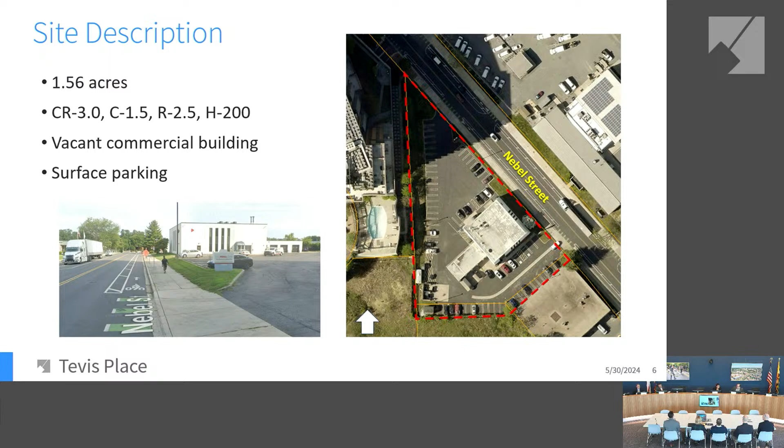Can I ask a quick question? Sure. I don't remember from reading—is WMATA holding onto that property for any particular reason? I assume it's for construction purposes, but— There's a lot of vacant parcel there. I happen to know the place fairly well. Actually, good question, because something I forgot to mention is that WMATA is partnering with the county, state, and federal governments to try to attract a life science user, a large life science development with over 2 million square feet on this part of the property. Okay, thank you for the question.

Is the Aurora building all occupied? Yes, I think these are all occupied. This is the newest building that's already constructed here, and this one is currently under construction. It's not shown—this aerial image was taken before construction started on this fourth building. And what are those other buildings, the one you said just constructed—is that residential also? Yes, this one is residential, all four of these are residential. This building, I believe, has the Harris Teeter grocery store in it. Okay, wonderful, thank you.

The property subject of these applications is just over 1.5 acres in the CR zone. It's developed with a commercial building surrounded on 3 sides with surface parking. There are currently 2 driveways from Nebel Street that provide vehicular access, one here and one here. There's a bike lane along the property frontage, separated from vehicle traffic just by pavement markings, and adjacent to the sidewalk. The property doesn't have any significant environmental features currently.

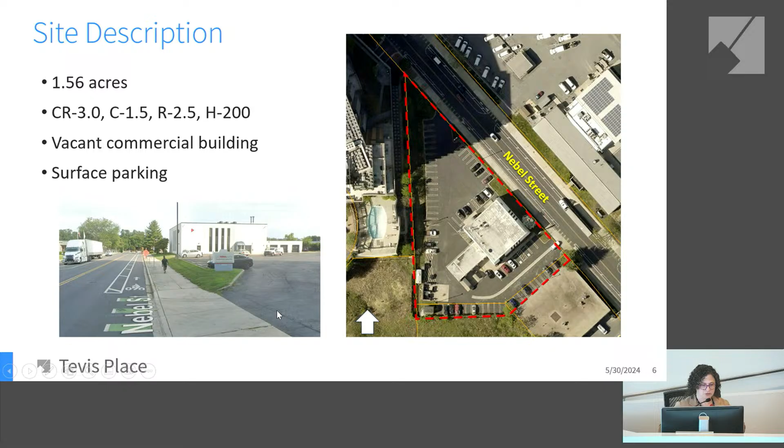The proposed building is 154 units, all of which the applicant plans to provide as MPDUs, affordable to households earning between 30% and 70% area median income. The applicant plans to apply for low-income housing tax credits and is working to identify other types of financing for the project. The building will have a variety of unit sizes ranging from 1 to 4 bedrooms to suit lots of different lifestyles.

Vehicle access is consolidated to one driveway on the northern part of the property, which leads to a below-grade parking garage and a loading space behind the parking garage.

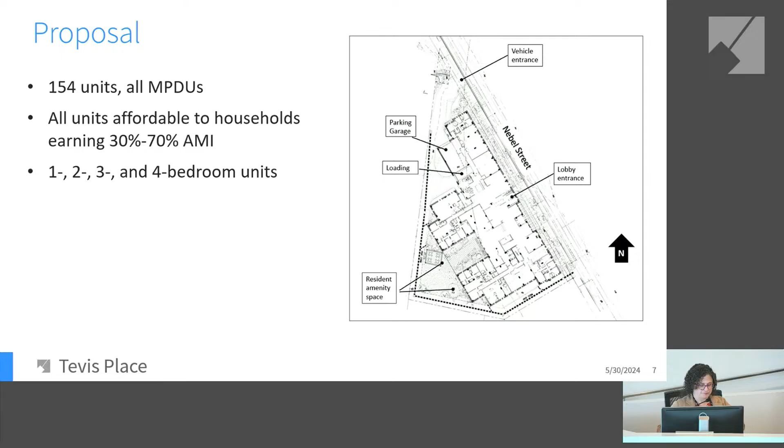Including bonus density for exceeding the MPDU requirement, the project density will be 2.8 FAR, or floor area ratio. The building will be 5 stories of wood framing over a concrete podium, for a total of 80 feet in height, or 7 stories. The architecture responds to the triangular shape of the property by framing Nebel Street with the primary building facade, with 2 smaller wings flanking a courtyard in the rear. The uses facing Nebel Street on the first floor, including a lobby and ground floor units, are designed to help activate the public realm and enhance pedestrian safety. Many of the upper floors facing Nebel Street will have balconies, and the streetscape will be enhanced with street trees and landscaping along the base of the building.

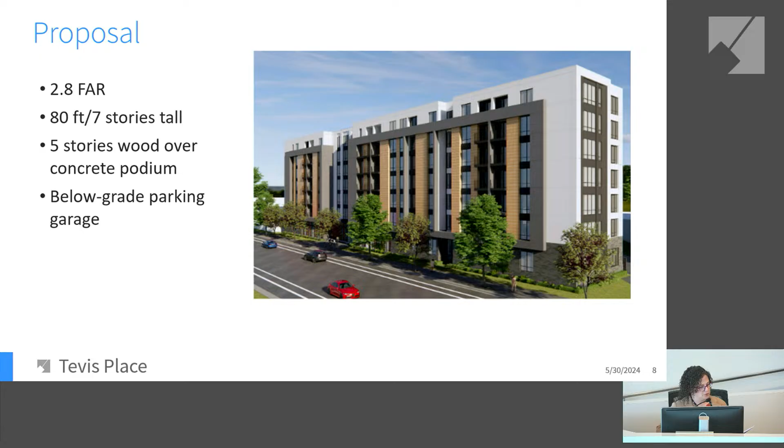Fortunately, this property doesn't have any overhead utility wires, so large street trees can be planted along the property frontage. Vehicle access has been consolidated into a single driveway on the north side of the property, leading to the parking garage and the loading dock.

And the streetscape, as I mentioned, will be improved with a street buffer planted with trees between the sidewalk and the bicycle lane. So the zoning code does not require projects on properties less than 3 acres in size with only one frontage to provide any public open space.

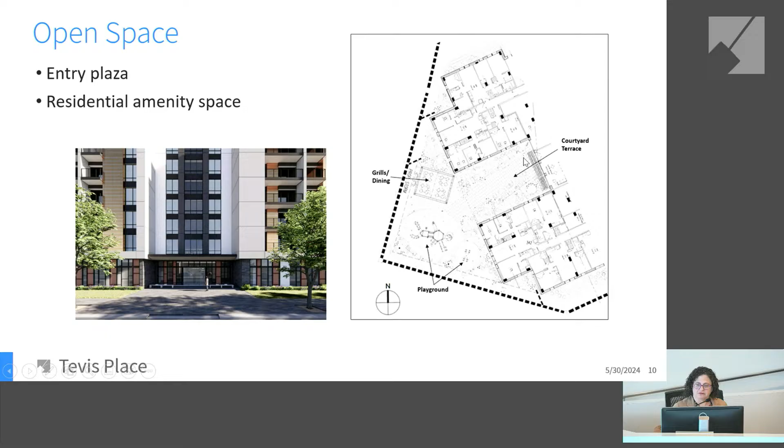However, the project is providing some public open space along Nebel Street adjacent to the recessed lobby, which you can see here in this image, and this area will include seating and landscaping. The project also provides outdoor amenity space for residents to the rear of the proposed building, and this area will include playgrounds, grilling space, dining space, landscaping and seating areas.

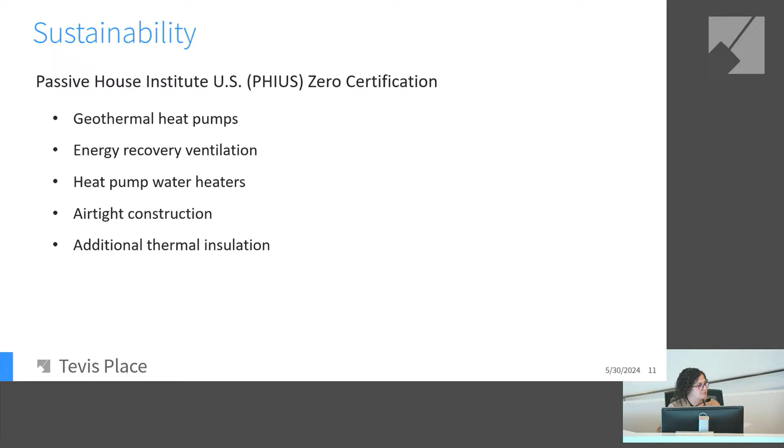So another fantastic feature of this project is the sustainability elements that are proposed. As I mentioned, the applicant is seeking Passive House Institute US, or PHIUS Zero, certification. These are just some of the elements listed on the slide that are over and above code requirements that will contribute to the PHIUS certification. The goal with PHIUS Zero is to net out the energy use on an annual basis with renewable energy. I don't want to steal the applicant's thunder here because I think they're going to describe this in a little more detail to you.

Regarding forest conservation, the 2/10 acre requirement for afforestation will be met off-site through a forest bank if available. If a forest bank is not available, the applicant will pay a fee in lieu.

This project earns what I think is a record number of public benefit points for the MPDUs, mostly because of the MPDUs that are provided above the code requirement. They're earning 450 points for the MPDUs, and points for proximity to the North Bethesda Transit Station and for providing the majority of parking in a below-grade structured garage.

Can I just ask a question? The transit proximity — they're just half a mile. What does it take to get 50 points? I think it's if you're adjacent or on top of the metro station, then you get 50. Oh, really? Is it an easy walking path, or do they have to walk around Nebel Street? I don't know if it's through the metro property — they have paths for people to walk to the metro. Because of the configuration of the adjacent buildings, you would walk on Nebel Street and then along Marinelli Road. So it's an easy walk on existing sidewalks. Thank you.

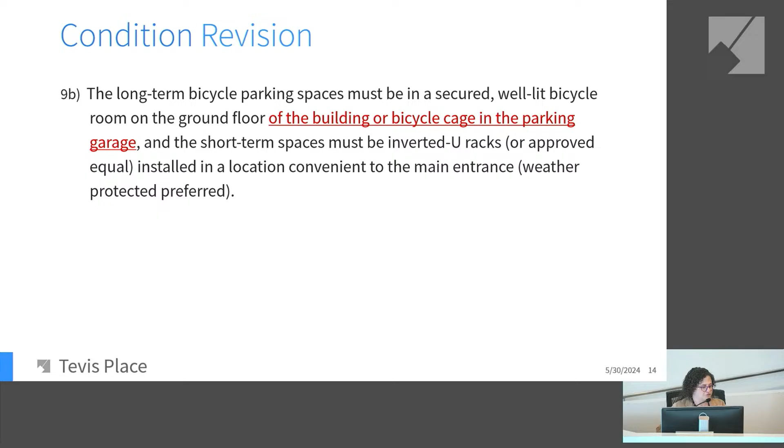And then in terms of the analysis and findings, the administrative subdivision plan satisfies all the requirements of Chapter 50. The site plan meets the requirements of Chapter 59, the zoning code, and the forest conservation plan meets the requirements of Chapter 22A, and it conforms to the environmental guidelines. And that concludes my presentation. Happy to answer any questions you have.

Since we have time today, can you show us the slide about affordability? Sure, I think that would be very nice to see. Thank you.

Do we know if, maybe I should ask you, if they're for rent or for sale units? Just curious, not that it matters. Sure. Good morning, Heather Dlhopolsky, Land Use and Zoning Attorney for the applicant with Wire Gill. They are for rent, but I will turn to Don Nuzio with the applicant, TM Associates, to give any more detail you may want on that. Okay, thank you.

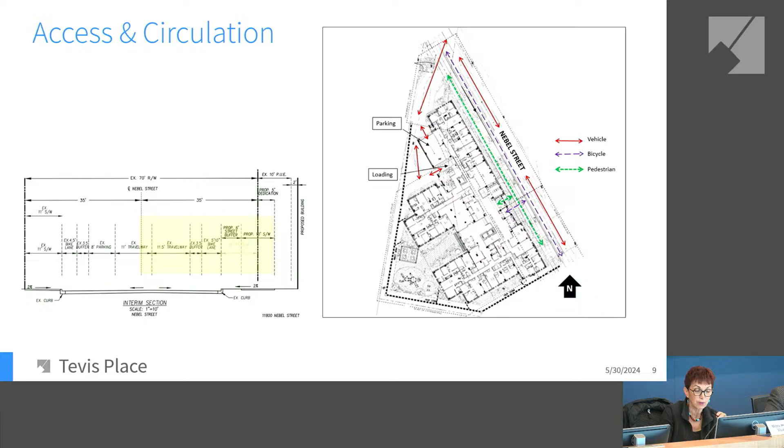Before I let you go, I think it would be good, because we have all of these residentials in the metro area in that block — do we know that within the last 5 years, how many units we have added and what percentage of those units are MPDU? With the ones that we have and the ones that may come, just in that block. It would be good information to know in that area. You don't have to answer it now, you could tell us later — in the area that you have it yellowed. Oh, okay, yeah, we can follow up with that. Yeah, thank you.

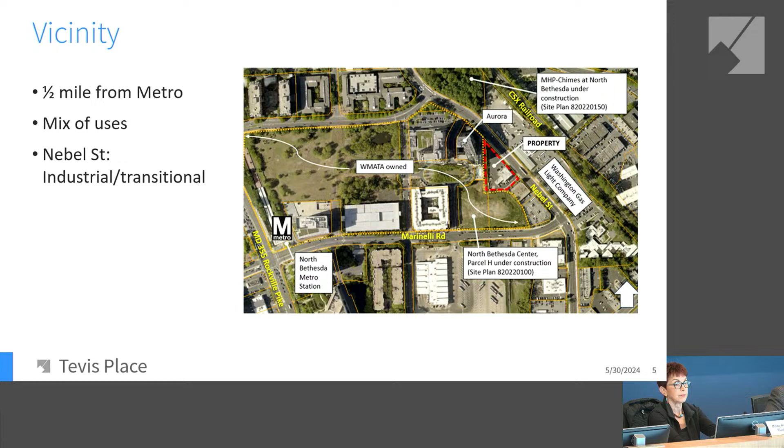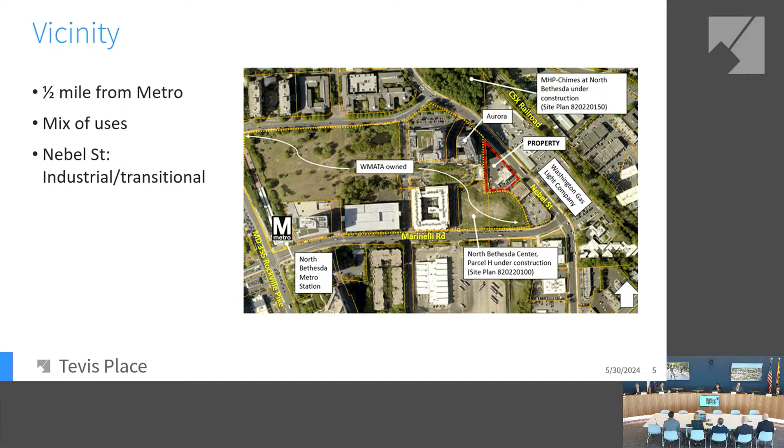Okay, so is there any questions? Josh? I have one question building off Commissioner Pedoeem's question earlier about the path that folks would take to get to Metro.

Looking at this image, there's a shared open space in the center of what's eventually going to be several buildings. Will this property have access to that space through the backside of the property? In other words, will people be able to access that without having to exit on Nebel Street first and then walk around?

So that is something that we explored here, but there is a big grade issue. There's a big wall here, and then this is a pool, I believe, on top of a parking garage. We did explore if there was some way to get through the parking garage to this green, but unfortunately that didn't work out with the grade and some of the other issues with this site.

Oh, okay, gotcha. I suppose, given that the property to the south is currently under construction, and I'm not familiar with how that site plan is arranged, I assume it was probably too complicated to figure out some sort of access point through that property, or maybe even some sort of easement. But it would be nice if there was a way to chop down the walking distance a little bit for folks instead of having to curl around on Nebel Street to Marinelli.

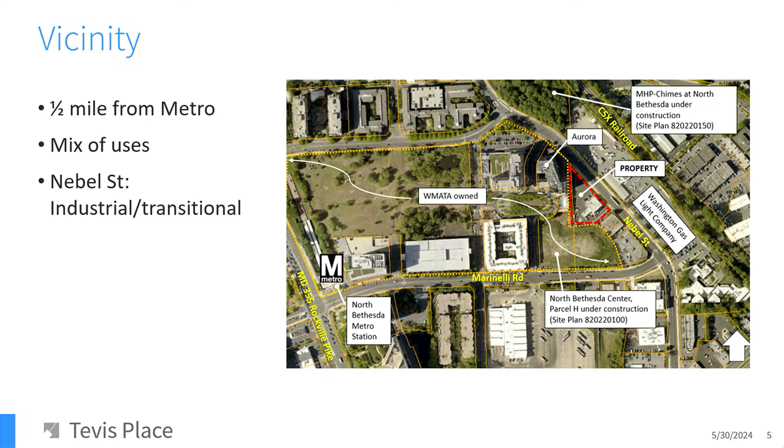For the record, Jason Sartori, Planning Director. I'm going to take the screen for a second and show you a street view from the actual site, the Tevis site. If we turn this, you can see the existing building on the site, and this is Nebel back over here.

You can see the parking garage that Ms. Tettelbaum has been talking about, with the pool up here, and this is the building under construction that comes right up to that parking garage. So you can see from the site, this is where you're asking if there could be access through here, which clearly would be difficult.

Okay. Okay, thank you. Any other questions?

One other general question. Can you remind us what the relevant master plan is that covers this area? Sure, thanks. It's the 2010 White Flint Sector Plan. 2010 White Flint, okay, thank you.

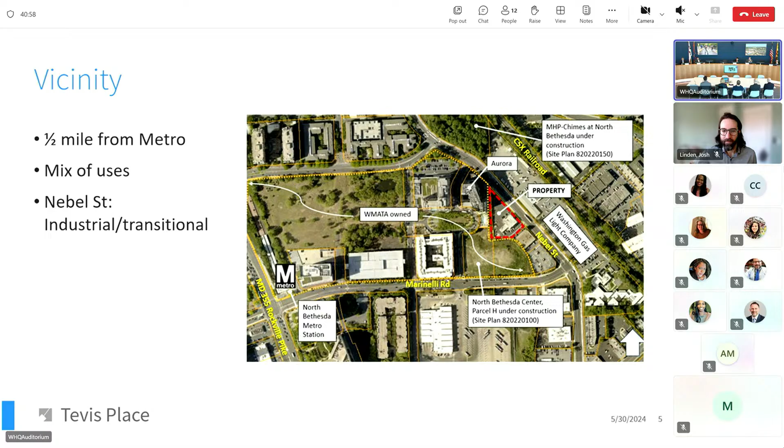Okay, so we have the applicant here, please take the lead. Good morning, Madam Vice Chair and members of the board. For the record, Heather Delapolsky, Land Use and Zoning Attorney for the applicant. I have three folks with me on behalf of the applicant, TM Associates: Don Nuzio, Adam Stockmaster, and Zebulon Culver. We also have Kevin Johnson with Johnson Burnett and Associates, our civil engineer, Rob McLennan with McLennan Architects, our architect, and online is Nancy Randall with Wells and Associates, our traffic engineer.

Just a quick comment regarding the access question: we definitely agree that having access from the west part of the property over to Metro would be great. It looks good on a 2D plan view, but there are a lot of grade issues here. We did meet with Elcor, the owner of Aurora, who is also doing other development in the area, and while we had discussions, we all agreed that given the physical constraints, it just isn't going to work at this time. But we do agree it would be a nice idea.

We're always excited to get to planning board, but even more so here, as we are the first MIC plan. We're very honored and excited to use that process. As Matt said, we completely concur it definitely required a lot of work and quality submissions on our part, but we hope and think we held up our end of the deal to get this project to planning board hearing and construction pretty quickly. Don Nuzio will speak in a moment about our experience more specifically.

We are in full agreement with staff's report and presentation, as well as all the proposed conditions of approval, including the revised one Emily mentioned in her presentation. We don't have a formal presentation today, but Don will speak a bit more about our experience with the MIC process and the sustainability aspects, which are very unique here, especially for a project that is fully affordable. If you have any other questions, our full team is here and happy to answer.

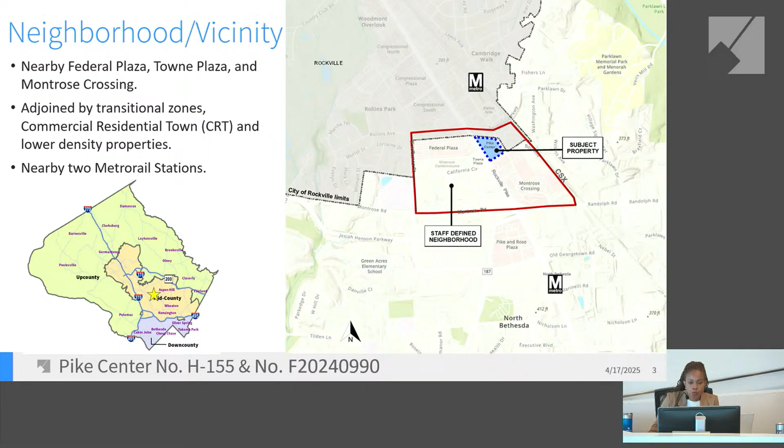Moving from process to the site, Pike Center is surrounded by a number of large shopping centers along Rockville Pike. It's surrounded by Montrose Crossing to the south, Towne Plaza, and Federal Plazas to the west. The staff-defined area outlined in red identifies the properties that contribute to the community character that may experience the most direct impacts of the proposed rezoning. The surrounding neighborhood is generally bounded by the CSX rail tracks to the east, Montrose Road to the south, East Jefferson to the west, and Rollins Avenue, Twinbrook Parkway to the north. The staff-defined area primarily includes commercial properties that abut the subject property, but it also includes some medium-density residential uses, some further west that stretch towards East Jefferson Street.

Bringing you more closely to the site, Pike Center Shopping Center is located at 12101 Rockville Pike, within our 2018 White Flint 2 sector plan. The tract area contains 8.24 acres of land. The property is zoned commercial residential with buildings permitted up to 200 feet. It's currently developed with approximately 80,000 square feet spread across 3 commercial buildings: an L-shaped retail strip pushed further away from the corridor, and 2 standalone retail pad sites closer to Rockville Pike. We have 2 sides of the property that abut the city of Rockville. I'll note there are no sensitive environmental resources on the property.

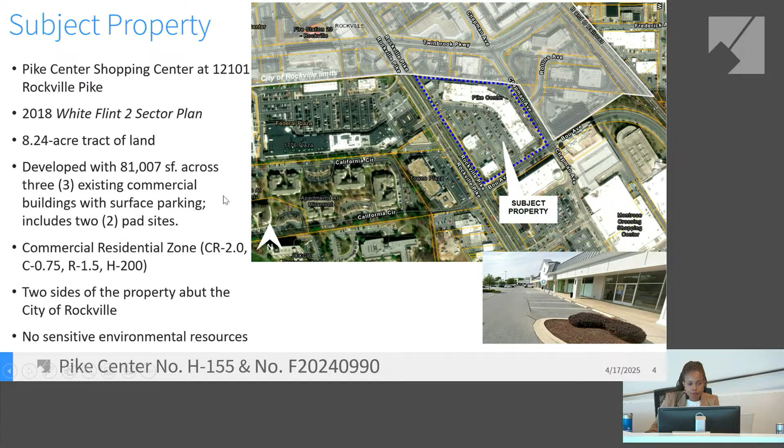Bringing you up to speed with prior approvals on the site: it was platted in the early 60s, but looking through the site plan history, there have been several applications for this property. In 2009, the site was approved for the addition of the 2 pad sites that currently exist. In 2010, there was an administrative approval for minor site plan modifications including parking shifting, lighting, and extending the canalization island. More recently in 2023, there was another amendment approved administratively regarding the applicant wanting to utilize the parking requirements of the zoning ordinance that went into effect in 2014. This allows the applicant greater flexibility with the tenant mix at the property, and there were no physical changes as part of this amendment.

Getting into the proposal, the floating zone plan proposes a rezoning of this property, which is currently commercial residential with 2.0 FAR, up to 0.75 for commercial, 1.5 FAR for residential, and up to 200 feet in height of development. They're requesting to go to commercial residential floating, which would have a max of 2.5 FAR, up to 0.75 commercial, up to 2.25 residential, and the height would remain the same.

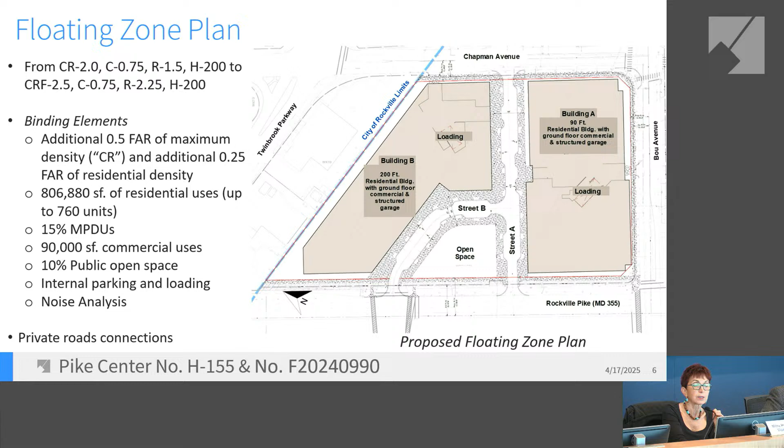Yeah, I understand that. My question was, could we just change the zoning to what they're asking rather than making it floating, or are we required to have it floating?

It's required. Robert Kronenberg, for the record: the county council, acting as the district council, is the only entity that can change a zone, and this is the way to do it. Usually for floating zones we see an R60, R90, or another lower-intensity zone changing to a CR type of zoning allotment. This one already had a CR zone, and the only way to increase the densities on it would be through a floating zone.

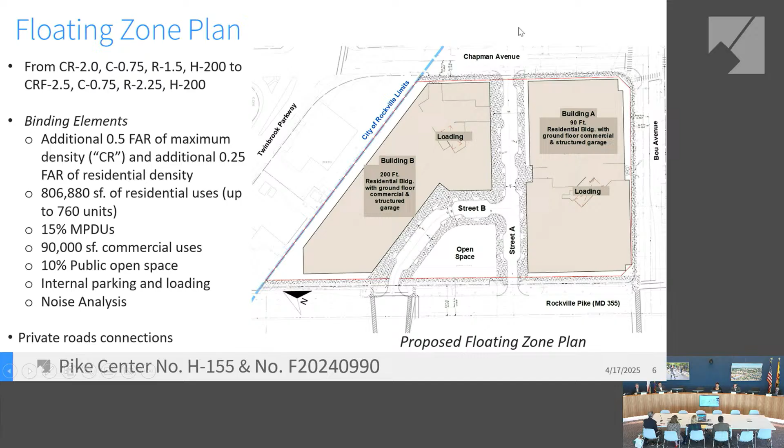The application will also provide 10% open space as well as 15% moderately priced dwelling units.

In terms of phasing, the application proposes 2 phases. The first phase consists of demolishing part of the existing strip mall, primarily on the east side, along with the 2 smaller freestanding pad sites. Building A, with commercial and residential, would be the first phase, and Building B would come in the second phase, during which the remainder of the building and the surface parking would be demolished.

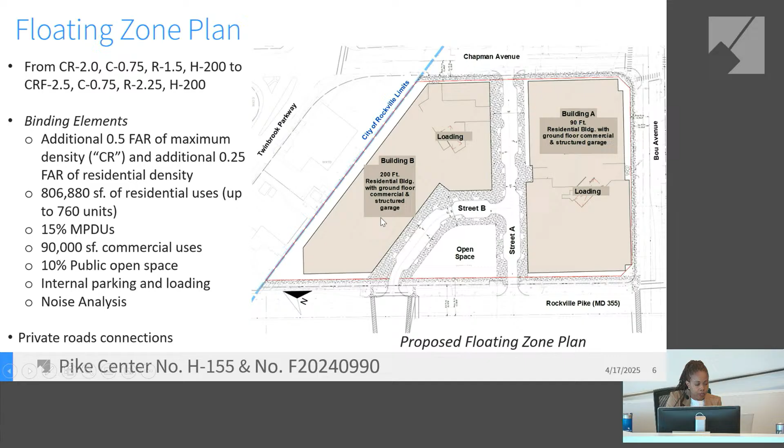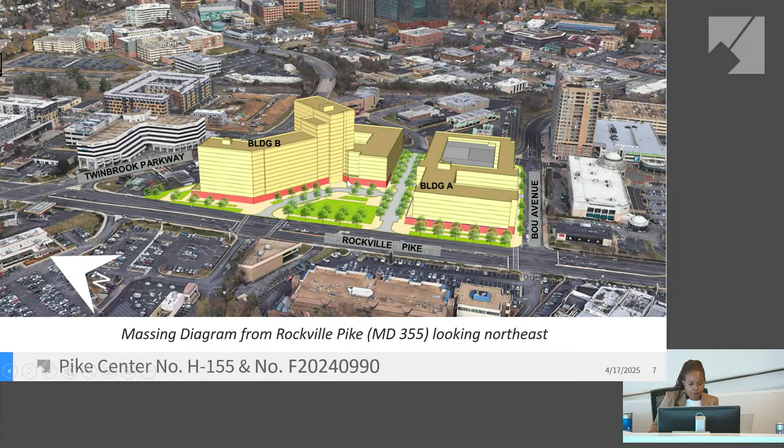The maximum height is 200 feet, so 90 feet is proposed for Building A, which you can see relative to the surrounding buildings. Building B is proposed up to the maximum of 200 feet. They're pulled forward to hug the open space and frame the central open space.

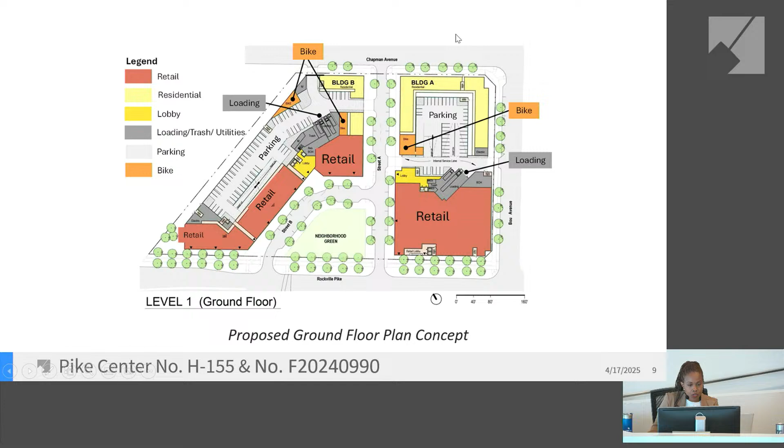As part of the improvements, the application will provide a number of right-of-way dedications, and this allows them to meet all of our requirements of our Complete Streets Design Guide, and also addresses our bicycle and pedestrian plans.

On Chapman Avenue, 5 feet of right-of-way will be provided, yielding a 10-foot wide side path. Along Bou Avenue, an additional 6 feet of dedication will be provided, yielding a 10-foot wide side path. Along Rockville Pike, the application will provide 15 feet of additional right-of-way, yielding an 8-foot wide bike path and an 8-foot wide sidewalk with a buffer.

I also want to point out that this segment is also identified as a future bus rapid transit corridor. There are prior studies that were done that settled on an exclusive center running transit lane for the buses. So that has been a part of this conversation.

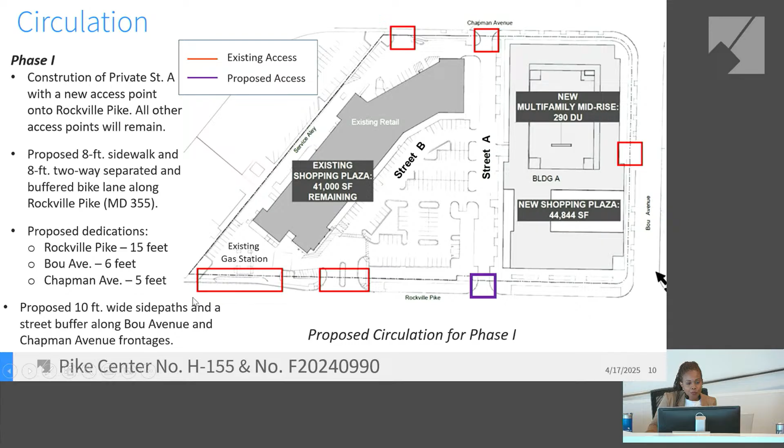The improvements along this frontage will be designed with an interim condition until the State Highway Administration builds the ultimate design. But this improvement will continue to be discussed when the applicant comes in during their preliminary plan.

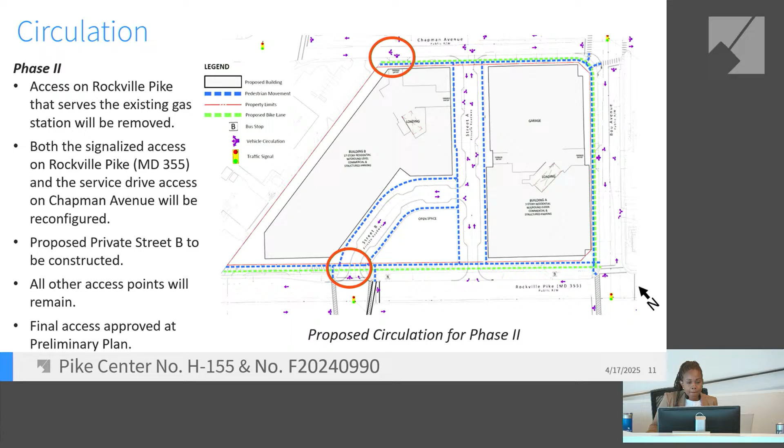Can I ask a question on that? I think you actually just answered part of it. I was going to ask that specific thing about how these bike ped improvements would eventually tie into the future BRT design. And it sounds like we're seeing it as an interim condition, which I think is totally fine.

But I wonder if, as more of these potentially come up along stretches of Rockville Pike, we urge applicants to consider or build out what will be a pretty high quality facility for bike ped. I don't know exactly how to tie them together so they don't have to be rebuilt in the future or redesigned. Because eventually this could also be a way to reduce the overall cost of the future BRT, which I think will include versions of bike ped infrastructure as well, potentially.

This could be seen as maybe a little bit of a marginal cost of the overall BRT project, but I'd hate to see many instances of having to tear up work that was done previously. I'm not sure what, if any, conversations can happen with SHA or MCDOT over the next few years about informing them of where these bike ped facilities are going, and seeing how we can fit them into a future design for BRT if feasible, so things don't have to be redone in the future.

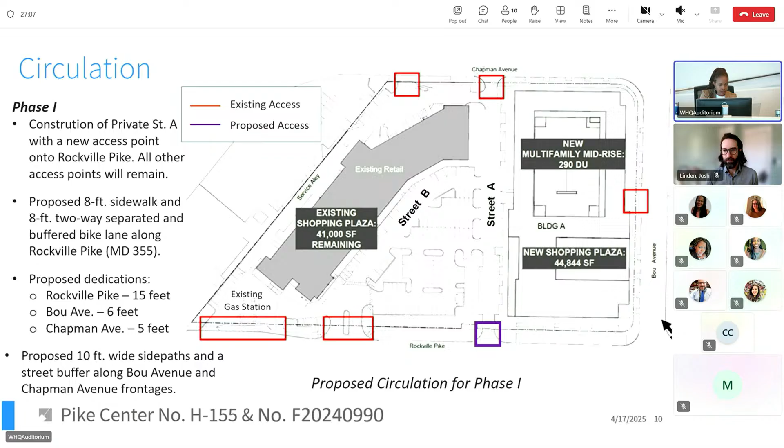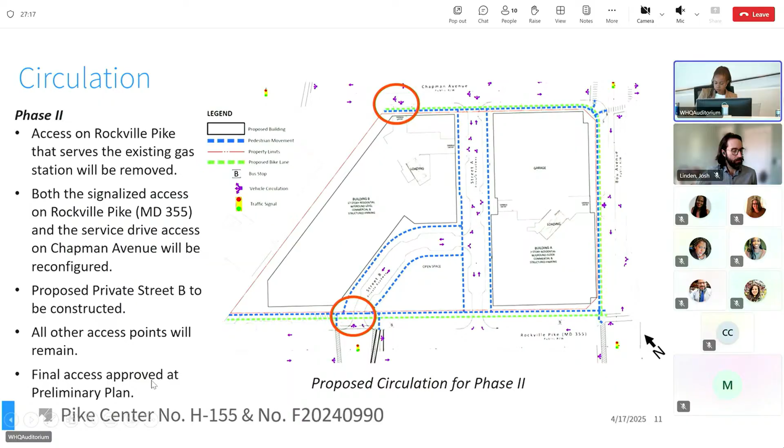Moving into phase two, there's an existing gas station here that has 2 curb cuts. In phase two, these curb cuts will be removed. That currently serves the gas station. You can see where the 2 red circles are. Both the signalized access for Rockville Pike and the service drive on Chapman Avenue will be reconfigured.

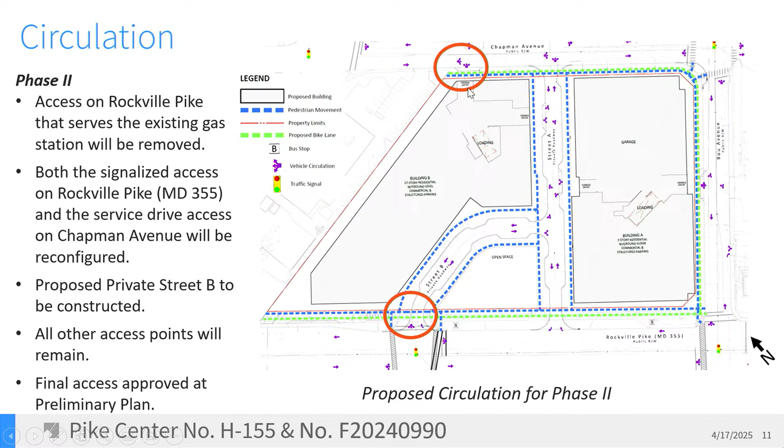And then proposed Street B will come online. This connects Rockville Pike to Street A. And then all of the other access points will remain.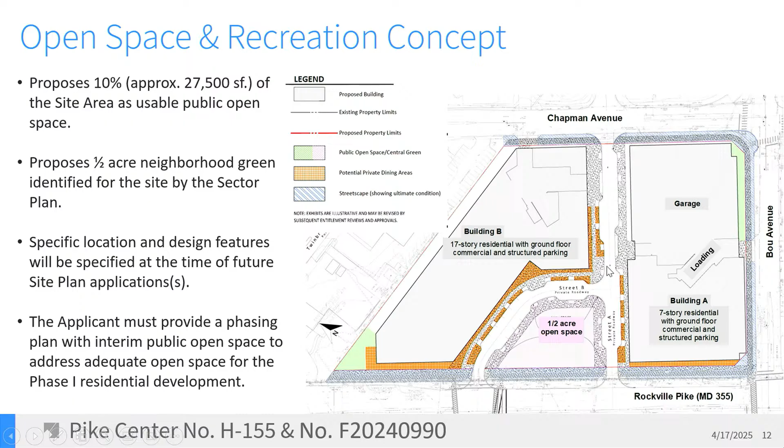Along with the local map amendment, the planning board is being asked to approve the preliminary forest conservation plan. In terms of environmental resources on the site, there are none. The property has a tract area of 6.7 acres with a little bit of off-site disturbance, producing a net tract area of 7.3 acres. This generates a 1.1 acre afforestation requirement, and the applicant will meet that requirement within a forest conservation bank or a payment of fee in lieu.

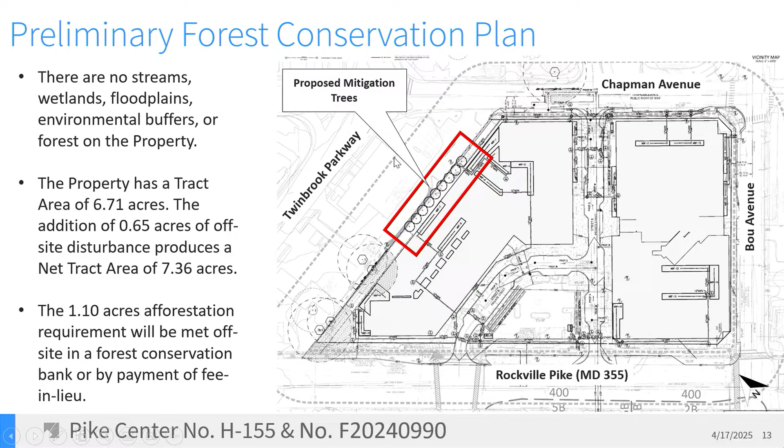What you see highlighted in this graphic is the proposed mitigation trees associated with the applicant's variance request. I mentioned there are no environmental features on the property, but the forest conservation plan and natural resource inventory looks at impacts extending at least 100 feet off the property. There will be some off-site disturbance for protected trees on adjacent properties, which of course will need permission from those property owners for removal, which the applicant is aware of. Here the plan is annotated: everything in yellow is proposed to be impacted, and the 3 trees highlighted in red are proposed for removal.

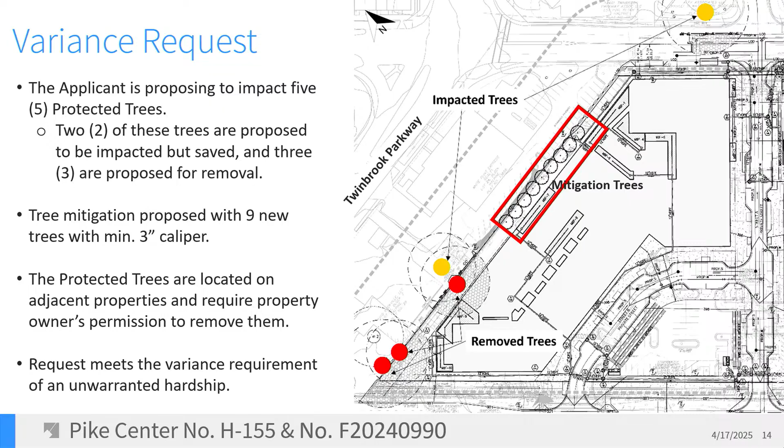The reason for these impacts is the demolition of the property, so these trees will be impacted when the existing property is demolished. Based on the diameter of the impacted trees and our replacement ratio, the applicant is required to provide 9 mitigation trees with a minimum 3-inch caliper. Overall, staff recommends the planning board approve this variance with the mitigation proposed, due to the location of the existing trees. We believe the applicant would suffer an unwarranted hardship to redevelop this property if the variance is not approved, in order to demolish the existing property and make improvements within the right-of-way.

Some folks asked about timing of construction, which is a great question. The first phase would begin in the near to midterm, estimated at 3 to 10 years, and the second phase would follow at a minimum of 3 years after the first phase is opened and occupied.

Residents and property owners also asked about the amenities of the park, though we don't have those details right now. They asked about the timing of the traffic study, which, as the board knows, is conducted during the LMA as a local area transportation review. We found the proposed traffic generated will not exceed area capacity, and it will conform to LATR guidelines. Additional review of those LATR requirements, such as mitigations, will be conducted during the preliminary plan phase.

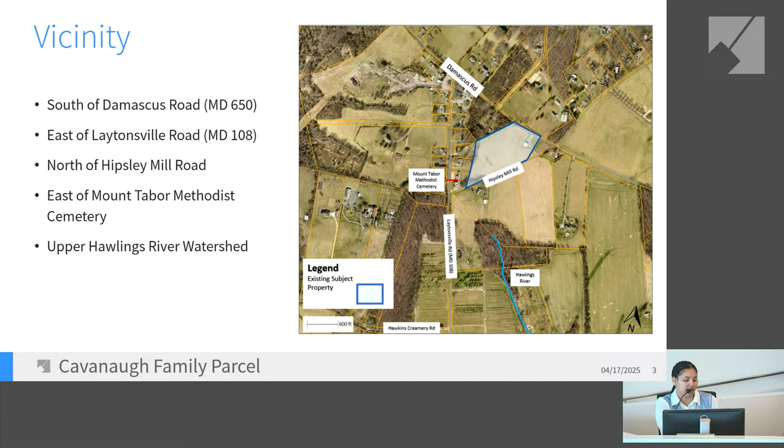The subject property lies within the Upper Hawlings River watershed. Nearby is also Laytonsville Road, also a state highway, and Mount Tabor Methodist Cemetery to the west. The property is within the Agricultural Reserve, commonly known as the AR Zone, and part of the 2006 Damascus Master Plan area. Surrounding the property are detached residential dwelling units within the R200 and Rural Village Center overlay zones, encumbered mainly by agricultural and rural open space within the AR Zone.

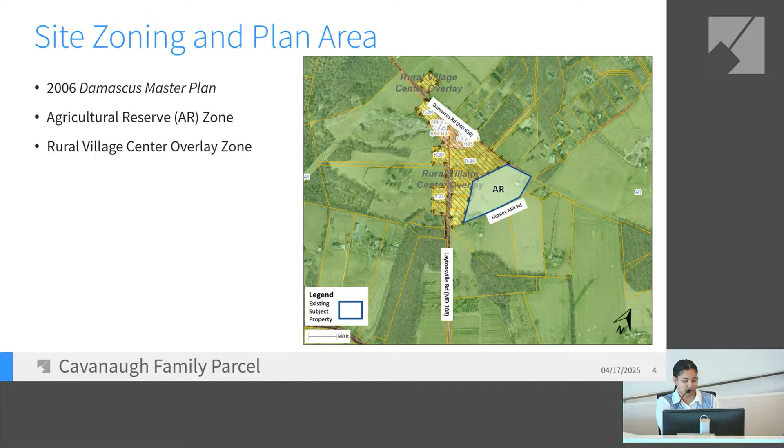The subject property is identified as parcel 960, consisting of 8.60 acres, with frontage on both Damascus and Hipsley Mill Road. The property is currently developed with a small barn located at the front eastern corner, operating as a small market for honey and housing for bees, which borders parcel 990, owned by Montgomery County. The property has a circular driveway connecting to Damascus Road and Hipsley Mill Road, where the eastern half of the driveway is shared with adjacent parcel 990.

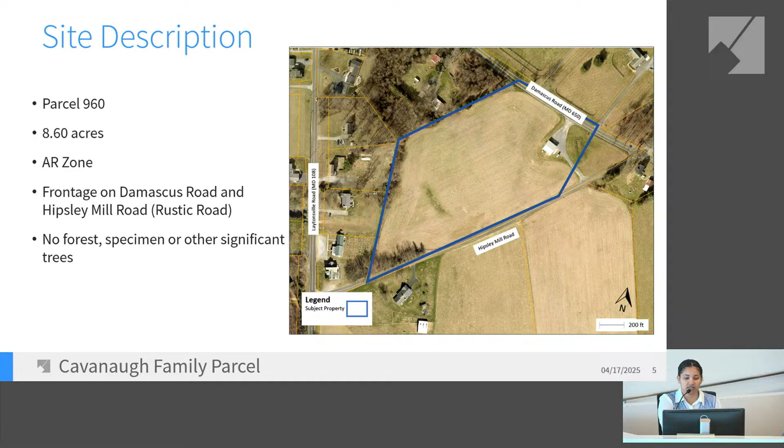The parcel contains no forest, specimen, or other significant trees. The applicant has fulfilled all required noticing obligations, including sign posting and mailing of the notice of application on September 8, 2024. Staff has mailed the notice of public hearing and received two community correspondences from the Patuxent Watershed Protective Association, supporting the application, and from an adjacent neighbor who asked general development questions and also supports the application.

The application proposes to create one lot at 7.56 acres for one new detached residential unit, and the small barn used for marketing honey and housing bees will be retained. The property will be served by private well and septic systems. The applicant is required to dedicate right-of-way of 0.37 acres along Damascus Road and 0.67 acres along Hipsley Mill Road. The new private driveway will connect to the existing driveway, maintaining access from Damascus Road. An afforestation requirement will also be met on site, and all forests planted will be placed in a Category 1 conservation easement.

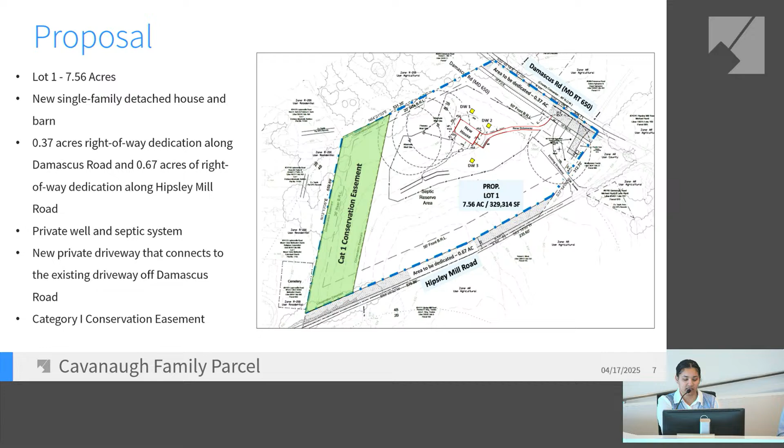Given the deed history of the subject property, as outlined in the staff report, the current parcel configuration originated on May 3, 1963. While tax records and the deed recorded identify the property as 9.21 acres in size, a recent survey of the land found the property to be 8.60 acres.

Thus, the application is exempt from the area and dimensional requirements of the AR zone and must meet the requirements of the rural zone. After dedication, the proposed 7.56 acre lot meets the 5-acre lot area minimum and 300 feet of frontage required by the prior rural zone.

As stated earlier, the property is located near the intersection of Damascus Road and Hipsley Mill Road. Per the 2003 Rustic Roads Functional Master Plan, Hipsley Mill Road is classified as a rustic road with a 70-foot wide ultimate right-of-way width. Approximately 0.67 acres of the land is being dedicated to Hipsley Mill Road, which is sufficient to achieve the ultimate right-of-way width.

The property is located within the Hawlings River watershed, where the 2006 Damascus Master Plan environmental recommendation aims to protect water resources by promoting agricultural conservation measures and best management practices. Additionally, the plan seeks to protect forest areas and wetlands through the development process. As proposed, the overall development, including the conservation easement, will be consistent with the master plan recommendations.

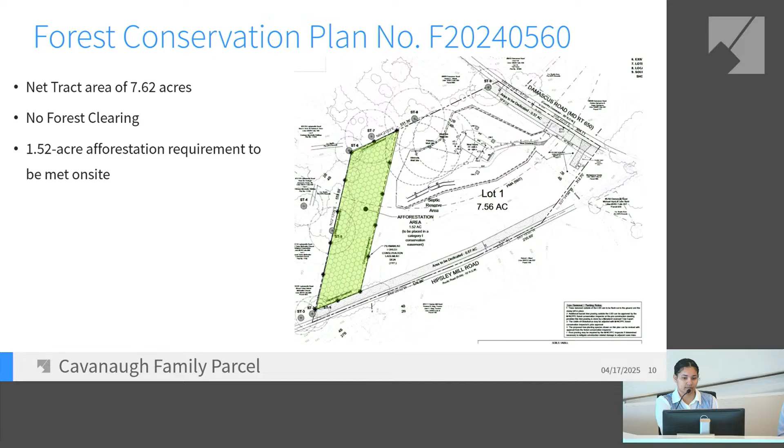The administrative subdivision plan conforms to the 2006 Damascus Master Plan. The public facilities are adequate. It complies with all provisions of the subdivision regulations. The lot is appropriate with respect to size, shape, width, and orientation for the proposed use, considering the legacy provisions. It also complies with Chapter 22A Forest Conservation, and it meets the applicable development standards of the rural zone and AR zone respectively.

Staff recommends approval of administrative subdivision plan number 620240180 and final forest conservation plan number F20240560 with conditions. And thank you. If you have any questions, we're available.

Thank you. Any questions from the commissioners? I have just a quick question on the afforestation, since there's nothing being removed. Does that mean an actual planting or just the Category 1 easement? What are the planting requirements? There will be, for the record, Josh Penn, 1.52 acres of forest conservation planting within the easement on site to meet their requirements. So they will be planting in that easement, and that will be a requirement.

Okay, great, gotcha. So is all the property forested, or? There is no current forest on the property. It's a farm field right now. So it is farm, they're just doing farming there, or is there no farming either? So no, there's no farming, but we do have the applicant available if I could defer to him.